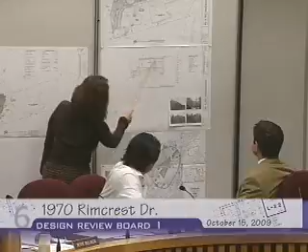No, not that I know of. No other questions? Okay, it's not that much - this is existing natural grade, and they're not cutting that much into the hillside to make it unstable. But I'm sure the engineering department will ask for further information.

Any other questions? We discussed the concrete retaining walls shown. Yes, they're not a decorative surface - the city asked them for what they're proposing, which is on that sample board. If you look at it, that is the type of finish the city is asking for.

To clarify, that was a recommendation by city staff. Of course, the DRB has the option to disagree. Thank you. Thank you.

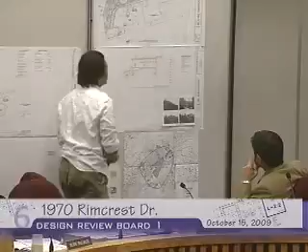So the existing deck that's there now, is it at this level here? Yes, that's the existing deck. So is this an existing retaining wall, or is this a new retaining wall? That is an existing retaining wall, I see.

And this is an existing footing, and all this is new? All that is new, yeah. This is new. So you're maintaining the existing retaining wall and footing, you're furring out a wall and waterproofing it and so forth. Exactly. And that's going to be the rear of the structure.

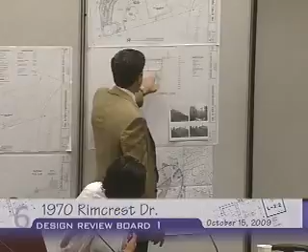And this new slab, is it a wood floor? No, it's a concrete slab. And it's slab on grade. Are you filling this area in, or is it going to be open like it's depicted here? It is going to be open, yeah.

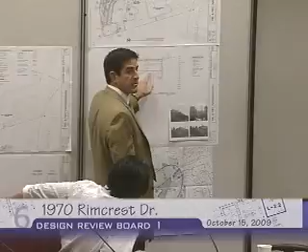And so have you looked into how this connection is going to occur between a new slab and an existing retaining wall? Well, actually, the footing that's drawn there is just kind of a recommendation of the engineer. We haven't really gone through it thoroughly to actually design that footing, but that will be done. Okay.

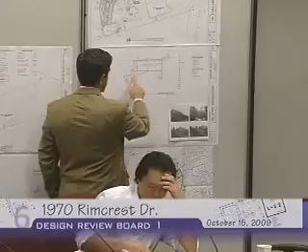These planters, this is the board forming concrete, for both walls, the first one and the one on top, and this one. Is this board formed as well? No, this is just regular concrete that's behind everything, so that wall won't be seen.

What type of windows are you proposing? We have solid fiberglass windows, the large picture windows with awning, small awning windows above. So the drawings say wood, but what's actually proposed is fiberglass? Yes, they are fiberglass. I'm sorry, I wasn't aware.

Is it fiberglass with wood inside, or completely all fiberglass? I think it's all fiberglass. Is it paintable? They actually come in bronze, but you can paint the fiberglass.

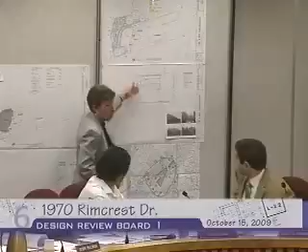So these planters don't go into the soil, they're just on the solid bottom? Yes. And how much soil is in those planters? Again, that's something that will be determined. That's not going to work, because if these are 2-foot intervals, it looks like less than a foot of soil, and that's not going to be able to support that.

The windows, it looks like there's an upper portion that might be decorative. Is it operable in any way? Yes, those are the awning windows, if you see it on the materials board there's a little sketch. Okay, I see the sketch, but on your drawing it's almost like a 6-inch, 8-inch portion, and I don't think that's big enough to be operable in your section.

Maybe a foot. What part is that? The line that they're showing is here. Oh I see, right, proportionally that's barely anything. You're saying you're planning on having an operable portion, yes, the awnings. This window that's drawn in the section is just shown as one-piece glass, but there's two components to that opening. Okay, because all your elevations match that proportion. But if you say they're operable, we'll change it to show that.

Now, in any of the ideas, did you look into having some sort of overhang or fin element that would block the sun, because that's a lot of glass on that southwestern orientation? We actually didn't want to protrude out of the hill any more than we already have. We were aware the sun would be a factor in that room, but that's the reason the deck wasn't protruded out. That could have actually been a pretty nice architectural feature you could have added. I know you were trying to tuck it in there, but it's sort of a bunker-like with a lot of glass, so having some other element might have helped hide that a little bit.

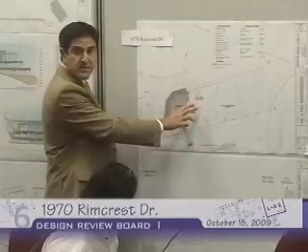It can be very difficult to build. Very difficult. Yeah, structural nightmare. The spa, the pool, and the planter - that was designed with that planter helping to buttress it, so that's not our engineering.

Any other questions? I had one question. The deck is solid concrete, right? And you don't show any columns in the structure, not that it really matters on the exterior, but I'm sure there'll be some. There'll be some, because you can't really span that kind of distance with concrete like that without support - it's a cantilever deck. As long as the supports don't end up being in the front, because then it would impact the exterior and we'll have to look at it. But if the columns are in the interior, then that's okay. Yeah, that's a good point.

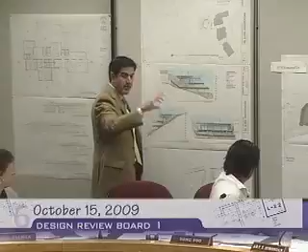That's also a good idea. I would suggest making the top awning windows perhaps a little bigger, as Mr. Yu is suggesting, in which case that would be much more of an operable window, because in reality when you have this, you're buying 3 windows. You have your fixed window, window number 2, window number 3, and if you're paying all that money, you might as well have something that's operable and works.

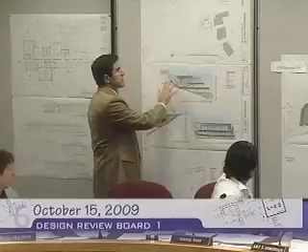So as far as the orientation, the design, the language, I have no issues with. My concerns, and I really should emphasize concerns, are structurally, in that you're hugging an existing spa that's an octagon, and then you're switching shapes and you're following this straight line into another octagon.

When you're digging this out, they're going to be drilling these piles in there and shoring this. It's going to be very difficult to do. So you might want to think about that and leave some room, maybe let these existing items be a thing of their own, and then build your own new wall away from it.

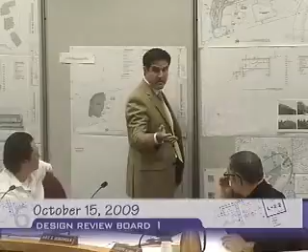Something to consider: this section over here, when you're building a planter and you're suspending a planter and putting dirt on top of it, it's very inefficient. What you want to do is have the soil of the planter sitting on the natural grade, so you're not putting stress on the foundation system, and so you don't have to engineer those planters to take on that load.

So you really don't need this back wall here. If you just have your board forming here, which is the way they're going to form this concrete anyway, you have this board formed planter in the front and in the back, and then you have the soil resting on natural grade. That's much more efficient, and that's what I would suggest you go with.

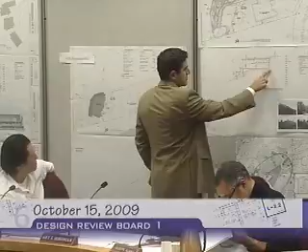We have a lot of window, which is nice, because when you're looking at it from below and looking up into it, you don't see a lot of mass.

But we could certainly soften things up if that's where the board is going, and those are secondary things. But the overall location, I don't think is bad, and there aren't anybody from the neighborhood that has come out in objection to it. So I assume you've either contacted everybody or everybody's on board, but since no one's here objecting to it, I assume that even the neighbors are okay with it as well. Those are my thoughts. Thank you.

Can I ask, on the planters, you were mentioning there should be... can you just explain a little bit further on the planters?

Well, we have this pile here, or this tile, that turns into a retaining wall. And then you have another pile here that turns into a retaining wall. So you don't really need to create this concrete bottom. They don't need to create this concrete shelving to support the planter. The soil could literally rest between these two retaining walls on the natural grade, which will take a lot of stress off of these two piles.

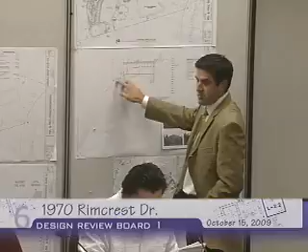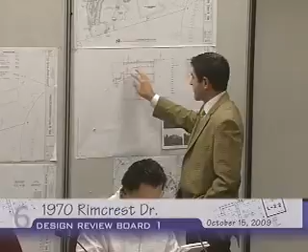Because if they're taking on the load of the planters, these planters have to get deeper, 24 inches or more, to support any kind of legitimate vegetation. And in so doing, piles will have to get bigger. So that's just a suggestion, to have a real planter there so they could grow some real trees to really camouflage the building. And that way, the structure will be working that much less, and they'll have better planters by doing it. Thank you.

Thank you, Mr. Aliano. Great, thank you. Yes, I agree with all your comments. Very good comments, so I won't repeat. I just want to add a few more things.

Aesthetically, I think there's some things that could be done to make the deck feel more in touch with that hillside, and they're very easy things to do. I think for one thing, since you're going to use fiberglass windows, which I have no issues with, especially if you're going to paint them, they tend to look really nice when painted with a brush. I would say if you're going to go in that direction, I agree.

I think that the small mullions or muntins at the top are really out of place. I don't think they go with this. I think the idea here is to create a room where you can look out and have nothing in front of you because you're trying to get the view, and keep it at that. I think the little detail of the muntins, it's not clear to me what it's trying to do. It's trying to add some detail, but at the same time it's really out of place because it's a very modern looking structure, all glass with the railing and the metal. So I would say probably those muntins should not be there.

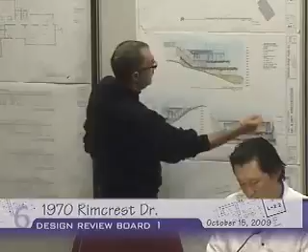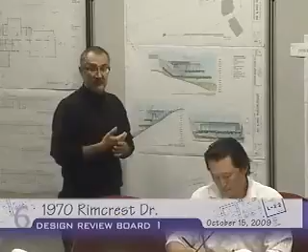Because I think from a distance, especially if you paint a dark color and with the glass, all of this is just going to disappear. It's going to blend, it's going to get reflections from where it's probably going to be inward. If your structure is exactly there, these are probably going to be much thicker, and that will change things, so you have to decide. So we're judging this today - we don't know what you're going to do with the structure, so we're assuming the structure is not going to be visible. So if these are not structural, I would say two things: either you fill in that panel and the header...

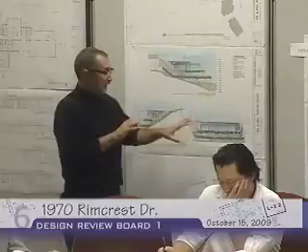You fill that in with a paintable material, either fiberboard or wood, and flush it with the windows, so the window and these panels are all painted, and it looks like a window system. Option 2 is to not have these things, and let the structure internally support the deck, and then have the window people combine these windows with special structural support to create some very thick mullion verticals, but that's okay. It's probably going to be a lot thinner than that.

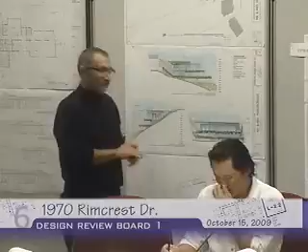That's option 2, to make all of that look like one piece. I'm not sure that's clear on the sides, but you could probably use a different kind of railing system there that complements the glass. But this is what we have here today, so that's what we're reviewing, and I'd say that's acceptable unless the planning department has another idea and wants to review it. You could probably use some kind of cable system for contrast, so that piece looks more like a little crown over this piece, and the railing on the sides are just utilitarian - not there to attract attention.

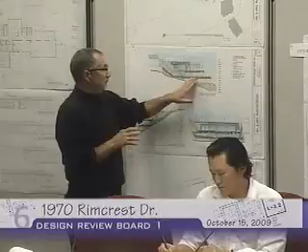Let's see - planters. I think the way you stepped them is good, and it's not clear in the notes whether it's going to be concrete block or concrete, so I'd say pick one of them. But if I were to give you my suggestion, because of the natural terrain around this area, these walls want to be as rustic as possible, so they blend with the hillside, and the glass, the void, and all that.

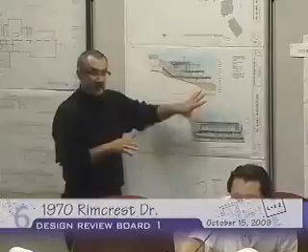This structure should not be as visible as the neighbor's - theirs is very visible because it's heavy, it's white, there's railing, it's just not as nice as this is going to be. So I'd say use the board forming, with nice contrasting boards that create shadows and look really rustic. I'd probably try to get away from standard gray, maybe add a tint of beige or some kind of natural earth tone color, to blend all this with the landscape. I agree with the comments on the landscaping as well. I think I said enough.

Just a clarification - Board Member Aliano, you were suggesting that the window system be drawn as a window system. Right now it's drawn as if they're punched openings, with very thin plastic mullions. They don't look right, and I think the intention was always that it's a window system - that's just an error in the rendering.

I just wanted to double check that you weren't recommending an all-glass butt-glazed system, but that you were accepting that there would be verticals there - that would be very heavy otherwise. You weren't requesting a butt-glaze system, but that it'd be a window system rather than part of the wall. So you'll see verticals, glass, and the verticals could be as thick as they have them if they want to use that thickness, or it could be part of the window system.

The window people will be able to take standard window sections that they make and combine them - they have a special system that gets really thick, but it would look like a big, thick mullion, which I think would look appropriate. And then the horizontals - we thought the horizontals were so that on top they could be operable, for some passive ventilation, not just for decoration.

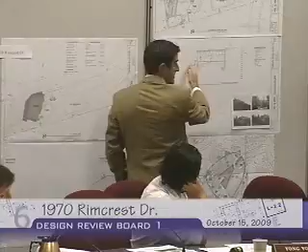That's probably what they're going to do. So if they board form this and board form this, then you'd have two board-formed concrete walls, which is very efficient because you'd have to build it anyway. And then what that would allow is in this elevation they could slope the dirt a little bit to actually reduce the height of the rear retaining wall, and they could put some nice shrubbery, maybe the landscape architect could give us more thoughts, a couple of rows from small to mid to taller ones or vice versa.

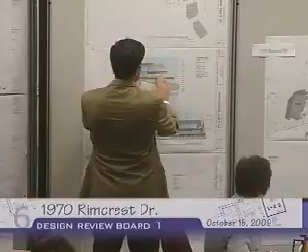So then there'd be this layering of landscaping, and this wall would be a lot smaller because there would be sloped dirt going up into it, which actually helps the structure when there's dirt on both sides. There's less stress on it. That's where I was going.

That makes sense if the board agrees that the sloping of dirt of that planter on the exterior would work and hold. That's something we can condition. Yeah, I think the idea is good.

What I'd be concerned about is that plants die eventually, they have to be replaced, and sometimes they don't get replaced. So I wonder what would happen if plants don't grow the way they're supposed to and don't get replaced, then you end up with a berm there, then you end up with an exposed foundation wall. It's south-facing also.

Southwest, so you're going to get extreme conditions. So the way it is right now, even if the plants there are not maintained or they're weak, you always have this nice wall that kind of screens the footing. Well, yeah, absolutely, because what you're saying is if this planter dies, then you end up with a decorative wall and a berm of dirt that may not hold.

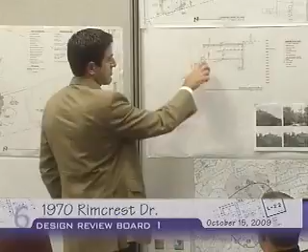And so assuming the planter goes straight across, and the same decorative material is used here, which is board forming, they could do that.

The thought about the sloping is to reduce mass, but so I think what we're saying is we're not opposed to having two planters, it's just we need the depths to be greater than what they are now. I think that's a good thought, though.

I like your idea. Because really, what is the planter trying to do? The planter is trying to create another zone for planting, right? But you're saying, what if during the planting phase, you still do a nice finish on the foundation wall, and then you just plant stuff in front of it. So now instead of having two concrete planes, you have one concrete plane, and the second plane is all landscape. Yeah, much more efficient, that could be kind of nice.

That's costly too, I think, from a construction standpoint, because the way it is right now, you're going to have two footings, one for the first planter and one for the other. And then chances are you'll be choking the plant at the top because you have so much concrete there that you won't be able to get anything much substantial in there. You have to have weep holes on the wall. So I don't know, I kind of like that.

It does change things a little bit, because now what you're saying is that second planter becomes basically a hedge, or some kind of planting zone.

Suggestions? I mean, we can make it an option. I think they have enough direction to work with the applicant and see what's most efficient. If his idea works, I think that would be nice too. In fact, it would look less massive than what they have now.

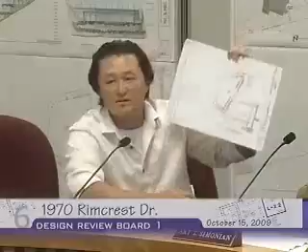I would just suggest maybe you could turn the staircases inward and use them as part of your support system to hold up this wall here, because then you have a double wall system you can try to buttress the existing wall with. Just a suggestion. Then you can open up sort of a 180-degree view all the way across.

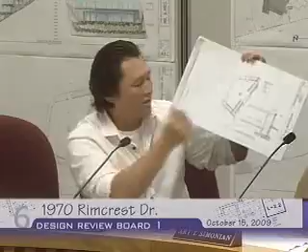Because as you're looking at this thing on the other side as well, it's nice to have this continuity of the glass and the slab coming at you, rather than glass coming down in the staircase on one side and glass coming down in the staircase on the other. It creates sort of a bookended effect that maybe isn't as nice as it could be if it was just all glass going across.

My second suggestion would be to try to take advantage of some kind of brow piece that protrudes out to create shadow lines on the glass. I think that would make it really interesting. Maybe some kind of thin element, not too heavy, that'll keep some of the sun off that glass, so you're not sitting in there at 90 degrees all the time with the sun coming in on the first 10 feet. So those are just my suggestions.

But all the other things that we talked about, I think, are very good to take into account. So let's see what the motion comes up with, and then let's see how this goes.

Do we have any motions that we want to consider? There's a lot of stuff that we talked about, can we have that read back? Yes: the trees to the south might block the neighboring view—reconsider the location of these trees.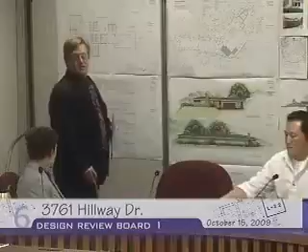As mentioned, this is case 1-PDR-2009-059A, located at 3761 Hillway Drive. I have a site plan for you that shows Hillway Drive with Whiting Woods down below.

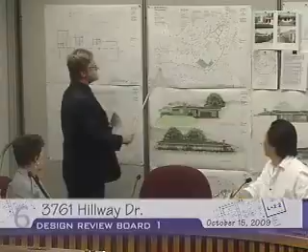It's a double frontage lot. Existing single-family house with a two-car attached garage. The applicant is proposing approximately 800 square foot addition to the side and rear of the subject house.

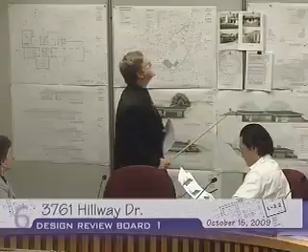I have photos for you to show the existing condition of the house. It is built with siding, stone at the bottom, as well as concrete block. Proposed elevations: the existing siding will be replaced with HardiePlank and the stone at the bottom.

We have a material sample board as well as a list for you. Existing roof plan as well as the proposed. The neighborhood survey with the photos and the map.

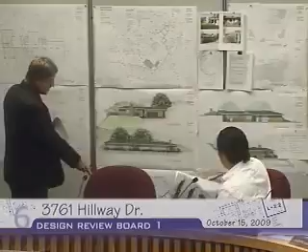In addition, we have a landscaping plan. There are some oak trees on the property, and the applicant has met with the city arborist and has obtained mitigation measures, which I believe were attached to your staff reports. Also, we have the existing floor plan and the proposal at the rear, as well as the existing elevations.

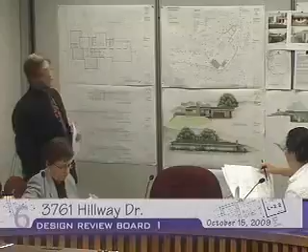This project is a first-time submittal for final review. The existing property is developed with an 1,836 square foot, one-story, single-family residence and an attached 726 square foot, two-car attached garage. The property is irregularly shaped and is a double frontage lot. As mentioned, it slopes down from Hillway Drive to Whiting Woods Road. The existing house is built on the flat portion of the lot and is accessed off of Hillway Drive.

The proposal is to construct 866 square feet on the first floor as a first floor addition, located to the side and rear of the existing house. Since the addition is greater than 700 square feet, it requires approval by the Design Review Board. The proposed remodel and addition are consistent with the ranch-style architecture of the existing building. The property is zoned R1R, is located in Floor Area District 2, and does comply with all the zoning code requirements.

The property is located in the Verdugo Mountains North neighborhood, which is a hillside neighborhood, and according to the guidelines, buildings in this neighborhood tend to be ranch in style. Materials in the neighborhood vary between horizontal and vertical siding, stucco, and shake siding. The proposed house's floor area is within the neighborhood average.

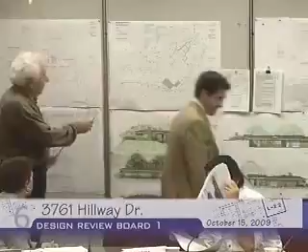We have a retaining wall here, which is very short. Yeah, this retaining wall here, and we have retaining wall here—those are existing. Where is the proposed one? This is the proposed one. Yeah, very shallow.

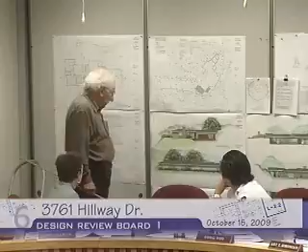Just simply to have a flat surface. How high is the far wall? Not really, we don't have very much elevation difference, very little—just this corner here that is about 2 feet lower. We fill that so that we can walk to the back of it, that's it.

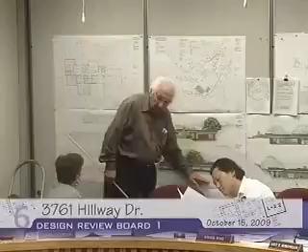How is that retaining wall going to affect that vertical slope that's out there? The height of that retaining wall will be at most, at this corner, 3 feet. Gradually it will go to zero.

Okay. Do you know what year the original house was? I'm sorry, what year the original house was? I think we have shown the original house plans, right? Yeah, the roof plan—is it in the video? Off the top of my head, I don't know.

Just wondering. The applicant may be able to answer that. There's a wall right here, there's a wall here—the existing.

Do you have any more questions for the architect? While we have it—so this is a new wall from here to there. Yes. Right now there's something here that's going to get removed, right? This is what's holding the dirt.

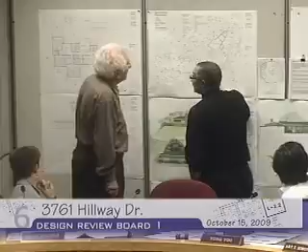Oh, I see, doing a guardrail of some sort. Yeah.

By the way, if you look at the existing—the sill element, that's concrete, right? Or what is it? I don't remember if it's concrete. Looks like it.

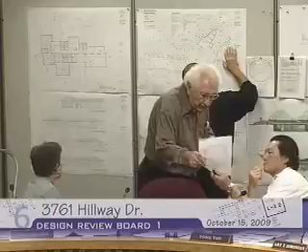I was just wondering what you were planning on doing with that, because I don't see any of it left. As far as I remember, that's wood, so I don't trust any wood that is old. Okay, all right. By the way, the new existing is concrete block—Hardie planks, hopefully it will make it much more beautiful than it is.

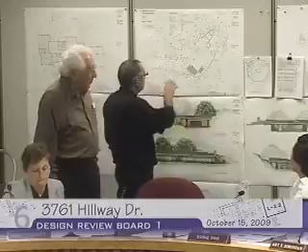Yeah, this new 42—is that like a metal? Is that what you're doing here? Yes, on top of a 1 foot high concrete block wall.

So this is fairly shallow here. Doesn't it look like a concrete sill? Well, that's where you're building—you need a foundation here. Because this looks like some, and then the rest is concrete block, like it goes up and becomes zero.

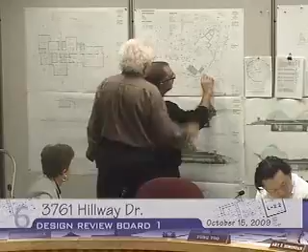Because if it's there, I mean, why not keep it? Make an element out of it. But the railing here is all—it's block? No, the railing will be like metal railing.

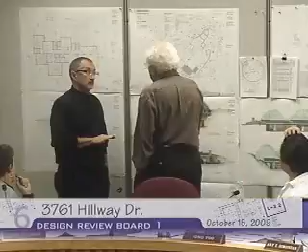The actual—right, but when you say top of wall, top of wall is the structure, and then on top of that you have the railing, 3.5 feet. So the visible height of the wall will be about 3 plus 4 feet.

You planning on putting any landscaping? For sure, yeah, we had a landscape plan.

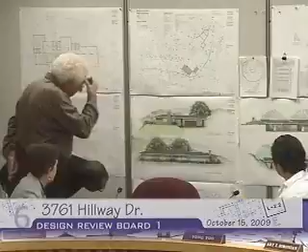I don't know, I can't read, but any planting here? That's a ground cover. Oh, this right here, okay.

Existing native planting to remain. Are you going to, when you do that wall, that whole hillside is probably going to be destroyed and you're going to have an erosion problem. Planning to mitigate that erosion problem with the new wall, or?

That's something that I have to talk to the landscape architect and a civil engineer about, to see what will happen if you remove those cactuses.

Mr. Chairman, the staff has put up an aerial photograph looking from the south up toward Hillway, if that would be useful in visualizing the house that's there now, as well as the surrounding landscaping. Yeah, so the approximate existing location.

The landscaping is pretty high, I mean, it's not... so the palm trees are going away. So you keep it.

In fact, if you look at this plans, you will see that there's so much tree here that it's not visible up. That retaining wall, and the wall is block, and then there's metal railing on top of that.

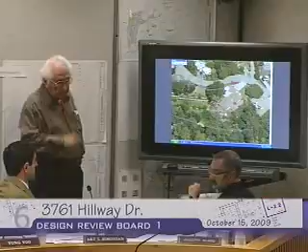But do we don't have a, what kind of block were you planning on? Decorative concrete block, I think we have mentioned that somewhere.

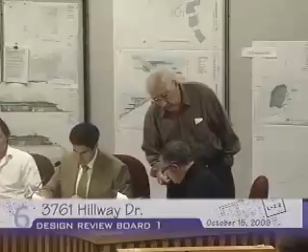Because the house has brick, right? Or stone or something. The existing is, we have submitted this as the finished material, and it will be covered by, because we have existing retaining wall on the back, and we cannot use decorative concrete block.

So you're trying to match that? Yeah. Okay. Thank you. Thank you.

I think that's it for questions for Mr. Agobian. I don't have any more cards for this project. Is there anyone else that would like to speak on it at this time? It's all good. Okay, it's kind of nice, too.

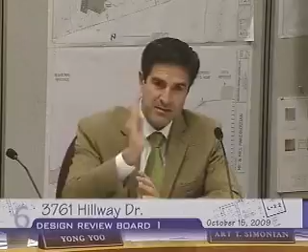Looking at the plan, it's somewhat of a contemporary plan inside in that it's got this linear corridor with spaces that come off of it, which works quite nicely. There's a lot of access to the backyard via the living room, the master bedroom, bedroom number 2 and bedroom number 3. They all open up into this yard that's created, and I could see why you're wanting to create that retaining wall.

Because everything comes out into it. In fact, our perspective shows these sliding windows, which might be Fleetwoods or whatever they are, coming out into the side yard, which is quite nice. So I support the project as well, along with some of those comments that were made.

Thank you, I just have a couple comments. I think it's a job well done. It's good to see this ranch style, and the painted block that was there gets an aged look, giving new life to it with the horizontal siding. The colors are interesting and vibrant. They're good. My only thing would be, you're using aluminum-clad windows, and you're going to white, right?

For me, it kind of seems like when you use white on such a high-quality window, it almost screams that it looks like vinyl. So I leave the color up to you, but maybe consider a richer color to go along with the rich palette that's already there.